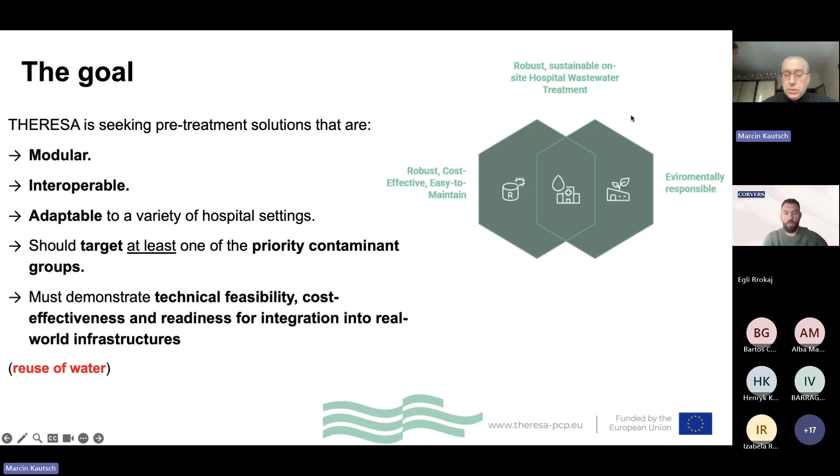work with that. And here in the brackets, you can see that I also mentioned the reuse of water. This is something that is also of interest to the hospitals. It won't be a mandatory condition, though it will be very welcome if you offer something like that. It's because hospitals use tons of water every day, actually. So if we can somehow go into more circular economy, reuse of water, it will be really good for us and also good for the supplier.

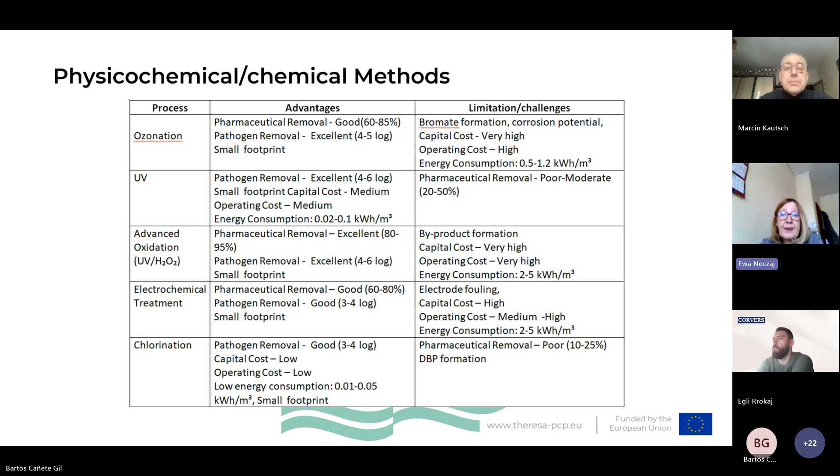Chlorination is not a good idea because disinfection byproducts are generated, but the main advantage is really low capital cost and operating cost.

Biological methods cover many different bioreactors, like MBR, and different types of filters. MBR is commonly used in a hybrid system.

Main advantages cover high total suspended solid removal, high pathogen retention, compact footprint, and modularity. The pharmaceutical removal efficiency is moderate, depending on the manufacturer. The main limitations are membrane fouling, capital cost, and operating cost.

The next bioreactor is also used in conventional technologies. The main advantages are high biomass retention, resistance to shock load, very high efficiency of pharmaceutical removal, compact footprint, and modularity.

Limitations cover potential for media clogging. The main limitation of this bioreactor is high capital cost and high operating cost.

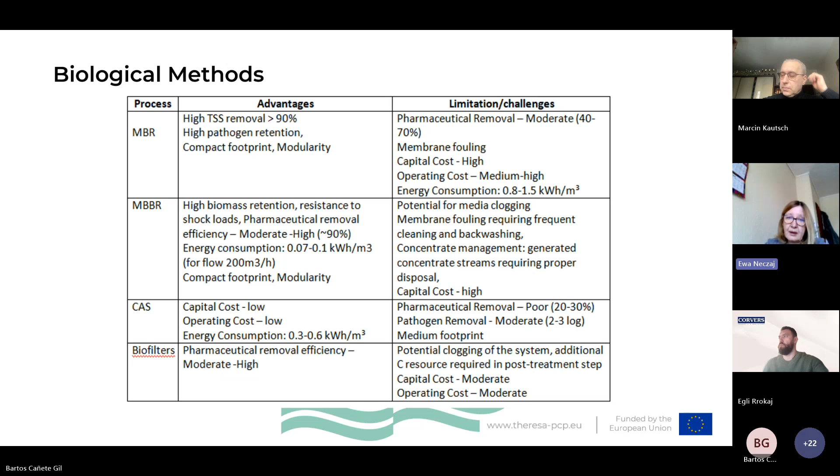Hybrid systems are the predominant solutions ready for use in the market. The main systems combine biological methods and advanced oxidation processes. The main advantages of the hybrid system are comprehensive contaminant removal, addressing both conventional pollutants and emerging contaminants.

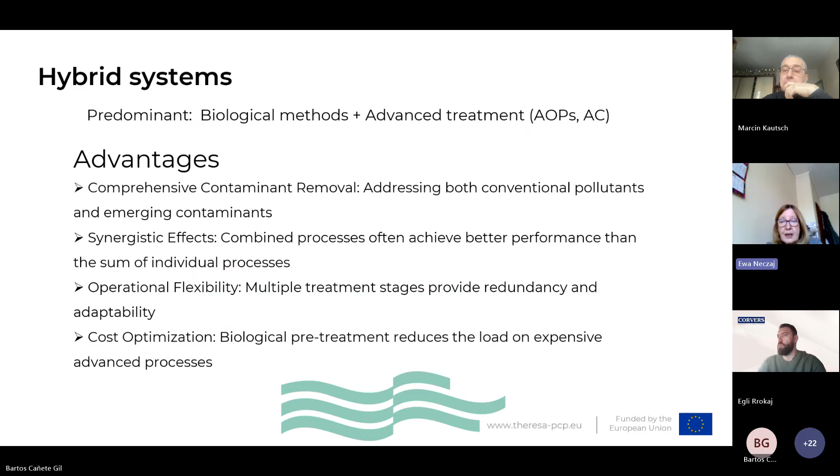Synergistic effects: combining processes often achieve better performance than the sum of individual processes. Operational flexibility: multi-treatment stages provide redundancy and adaptability. Cost optimization: biological pretreatment reduces the load on expensive advanced processes.

You can see on the next slide the efficiency of the hospital treatment process in a hybrid system. These results are from a real hospital. The efficiency of pharmaceutical removal is high, but only two compounds are relevant to the Theresa project: ciprofloxacin and clarithromycin.

As you can see, the efficiencies are really very high, more than 95%, almost 100%. The concentration of pharmaceutical in the effluent is also really low: for ciprofloxacin below 100 nanograms per liter, and below 20 nanograms per liter for clarithromycin.

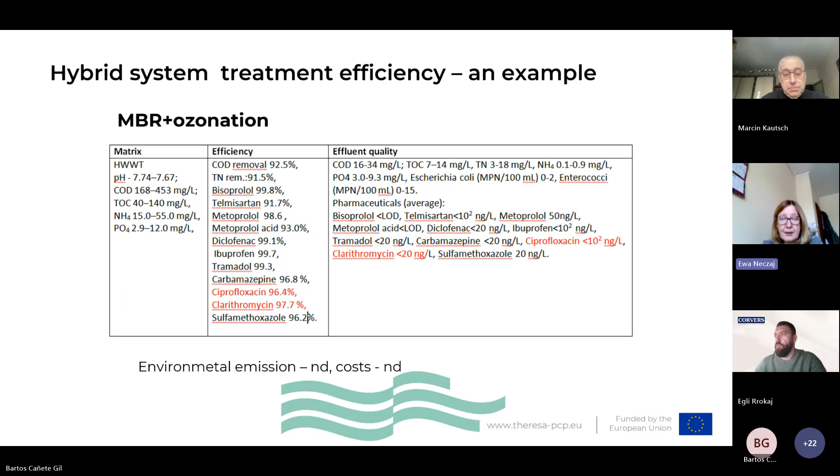May I have the next slide? The main gaps and limitations of the state-of-the-art analysis are the lack of technological solutions: compact modular systems, easy to operate, waste-free. And the next one is technical limitations, on-site scalability, integration with hospital infrastructure.

Economic limitation - high OPEX and CAPEX of the proposed technical solution - and no legal regulation for wastewater discharge from the hospital into a municipal sewage system for all European countries.

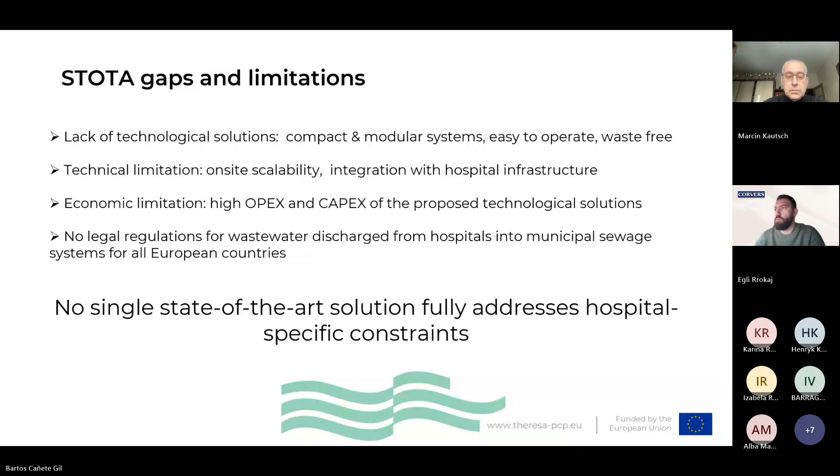First of all, thank you Ewa for the comprehensive presentation. So my name is Egli Rrokaj. I am economic procurement consultant at Corvers, and we are partners in the Theresa PCP consortium.

So the next presentation is going to be focused on the contaminants for each category that we are targeting as a project. The purpose is not to present the individual contaminants and the list, because if you go to the website, you can access all the lists and the short list of contaminants there. The purpose here is to explain the logic and methodology of how we derived and shortlisted these contaminants for each category.

So first of all, as a Theresa PCP project, we target four categories: cytostatics, X-ray contrast agents, antibiotics, and ARBs and ARGs. We want our solution to target all these four categories. And for each category, we have shortlisted some specific contaminants that we want the solution provided by the companies to target.

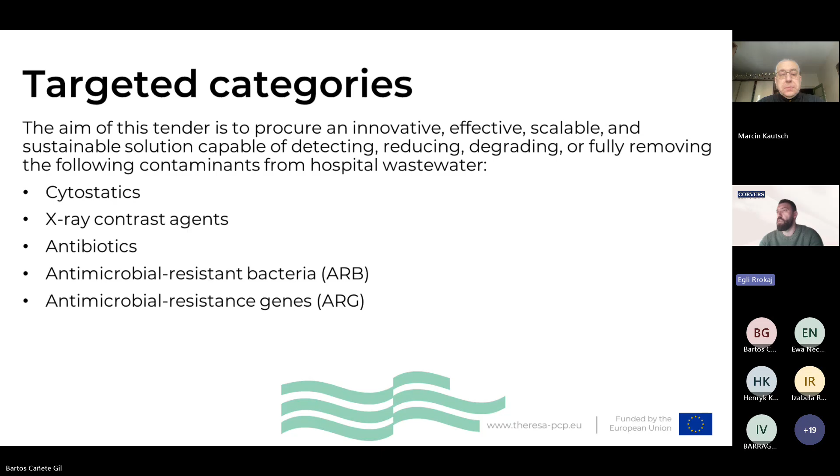Next. So in order to derive those shortlists for each category, we followed a process and a methodology, and it was kind of a long process. We started in September with a kickoff meeting, and we finished, and we're still working on the general requirements. After a long process, we finalized the list of contaminants for each category.

So that methodology started, as I said, in September with the kickoff meeting of the project, where we had an on-site workshop, and each end user was grouped by category according to expertise. Then we requested each end user to appoint a designated expert to help us with the workshop that we organized. Depending on the topic and the expertise, each hospital was bringing experts according to the need.

Then we shared an initial matrix with the suggested contaminants that we should target as category. This matrix was basically provided by Navarra FMS Hospital, the lead procurer.

Then, based on that, we started our first initial process in order to kind of try to see which contaminants we are going to target for each category. Then we organized bi-weekly meetings with the hospitals to ensure alignment and discuss which contaminants we need to target. And of course, we also had ad hoc meetings based on the need, every week.

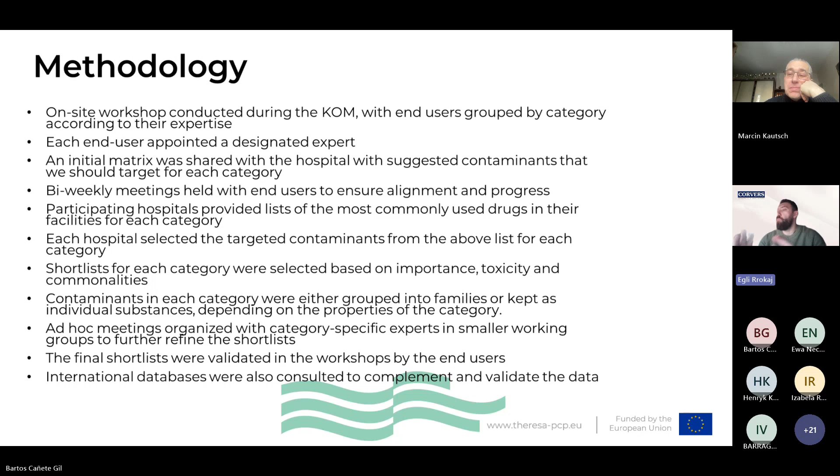And as I said, the shortlist had two elements. It was the input from the hospitals themselves, like the drugs that they use in the hospitals, the ecotoxicity, the environmental aspects, and the importance for the facilities. But also at the same time, we consulted international databases like the World Health Organization and list there in order for our shortlist, our data, contaminants that we target to be as more complete and comprehensive as possible.

So now we are going to go for each category, the contaminant that we choose, and kind of explain the logic behind it. I'm not going to go through the full list because, as I said, you have the full list in the website. You can go to OMC, you can access all the documents and see what specifically we are targeting. I'm just going to go through the logic behind each category.

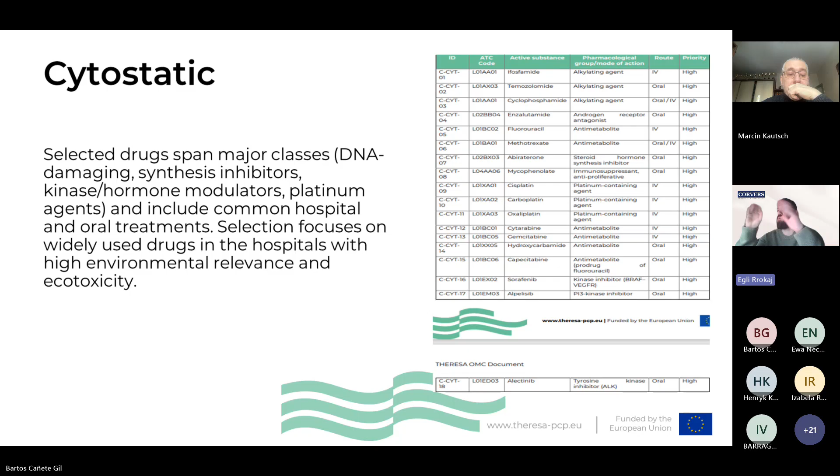First, for the cytostatic drugs, again, the selection here was based into families, and these families that we have several components, are the ones that are more widely used drugs in the hospitals, and at the same time they were shortlisted based on high environmental relevance and ecotoxicity. And as you can see, the selected drugs span major classes like DNA damaging, platinum agents, inhibitors, etc.

The next category is the antibiotics, that again, it was shortlisted into families. So we are targeting 8 distinct families. And again, this list had two elements. We took the initial list that the hospital provided of the most commonly used antibiotics in the hospitals. Then we complemented it, making sure it aligns with the World Health Organization priority pathogens classifications. And here, we focus on the critical groups, high groups, and medium groups. And here, the 8 families that we choose ensure coverage of widely used antibiotics with significant resistance concern.

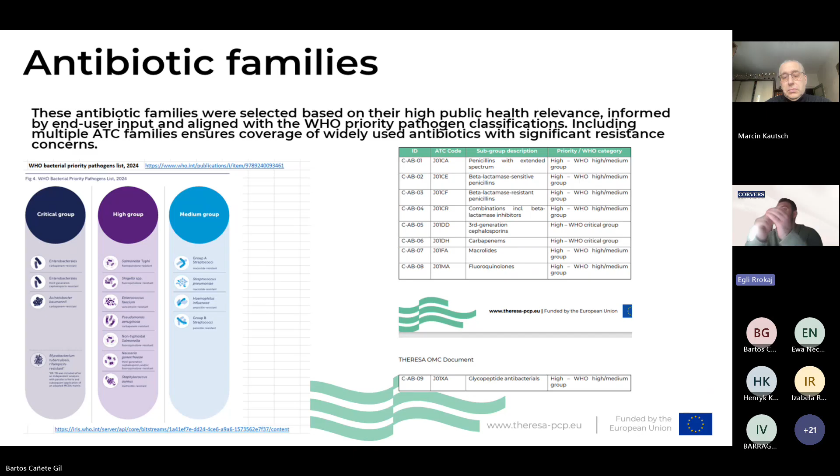And the next category is the X-ray contrast agents. Again, here we went with the family approach, and basically we split it in two distinct groups. We're focusing on CT and MRI agents, and again, this was based on what is most commonly used by the hospitals, that as Marcin correctly explained, we believe that what is being used at the hospital is being used widely in the whole Europe.

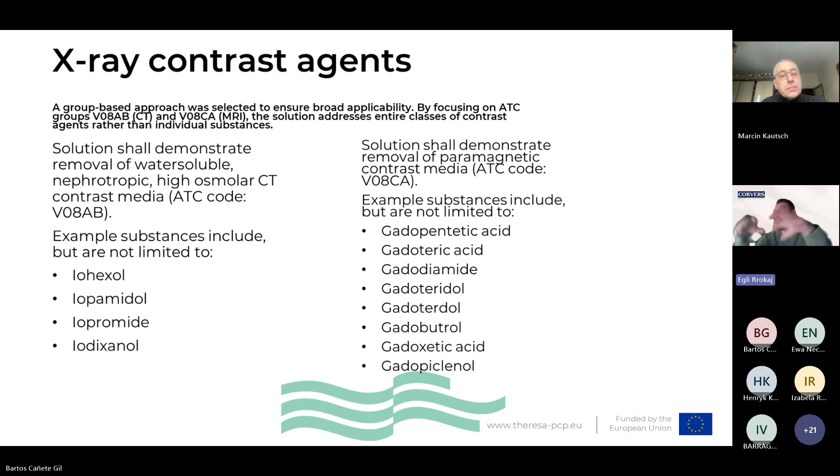And that is the reason that we are also focused on targeting specific groups. We split that into groups and families, because one hospital may not use iohexol, for example, but probably is using another contrast media in that category. So we believe that by focusing on the families and the groups, we are making our solution also to be used in the current 7 hospitals that we have, but also it has the possibility to be scalable and be used all around Europe.

The last category is the ARBs and ARGs list. Here we follow a different approach. We are targeting individual drugs and contaminants because based on the properties of this category, we believe that it's not a good approach to target families. Rather, we are targeting individual substances. And here, the selection has been made following the World Health Organization priority pathogens list.

Also, besides those 4 categories that are a priority for us and the solution must treat those substances, we are also targeting some additional drugs. We are targeting the drugs listed in the Urban Wastewater Treatment Directive as well as the Water Framework Directive. These are nice to have, should be preferably targeted, but we believe that since we are seeing that the European regulations are moving that way, and in the future those drugs and substances mentioned in those directives are going to be asked for the hospitals to be covered, we believe that preferably we would like to have them. And we believe that for a solution it would be nice to address also these categories.

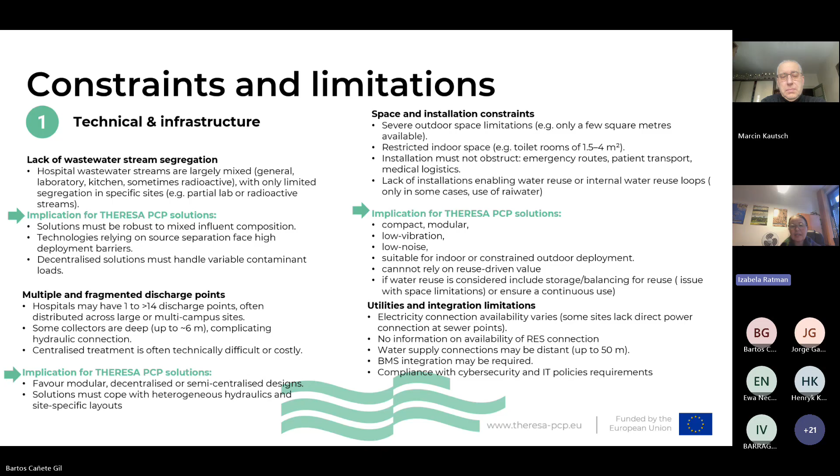On the operational and organizational constraints, the hospitals have limited capacities. They have also limited staff to operate this equipment. Sometimes these types of services are outsourced. So we are looking for solutions that would be low maintenance, highly automated, of course operating 24/7, operable without any specialized staff, and of course fail safe.

And something that I've already mentioned, the noise constraints, odors, which are very important, and the solutions also have to be pest-proof. So whatever you would like to propose has to be, first of all, enclosed, odor tight, low noise, vibration free.

On the regulatory and compliance side, as I said, these studies are still ongoing. Nevertheless, from the information that we got from the hospitals, from the baselines, some hospitals may need to comply with some physical chemical limits of the effluent for the discharge. This may be resulting from the discharge permits.

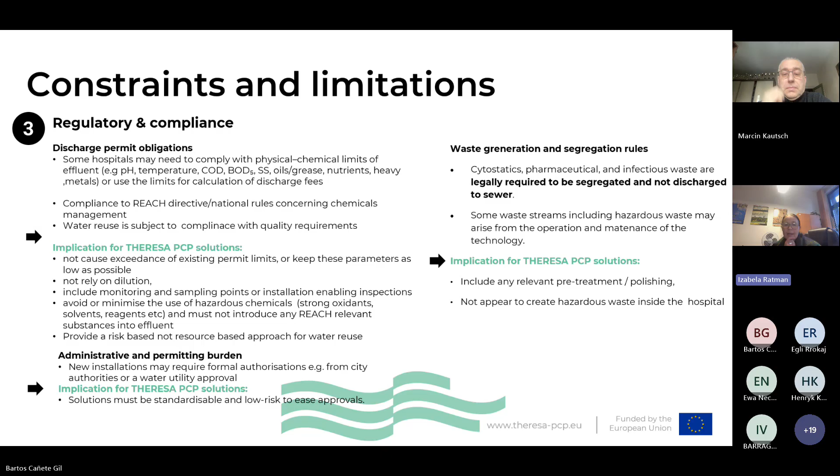Yeah, and one of the major constraints and limitations, which is quite important for you, is data related. You know for sure that there are no thresholds that would specify the maximum content or the removal rates for the target pollutants that have been presented to you. So that is really challenging.

We are working on it to come out with a proposal of reasonable solution here. We also have some limited baseline data concerning what is happening at the hospital grounds. The hospitals do not monitor the pharmaceuticals, the target contaminants presented to you. They also do not monitor routinely some key physical chemical parameters, simply because this is not required by law. Also, the estimates on the effluent flow, either daily or yearly, in many cases are based on the water consumption, because these are the typical sensors and meters installed in hospitals, mainly on the inlet of drinking water.

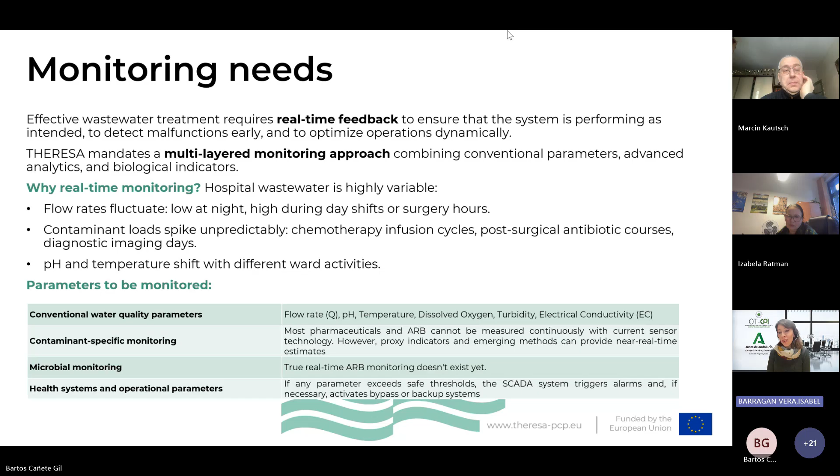Next slide, please, Bartos. Well, all the data that is going to be monitored through the solution should be logged continuously in a centralized database, should be visualized in real time via dashboards, should be exported for reporting, accessible remotely for troubleshooting, time-stamped and traceable, stored securely, and reported transparently. Hospital wastewater is not a clean lab matrix, that is why the monitoring system must tolerate high organic content, suspended solids, variable pH, and temperature swings.

Next slide, please. Also, another requirement of the final solutions is the need for automated sampling and digital integration. Theresa requires the automation of sampling and data integration from targeted contaminants. The main reason is that manual sampling presents different challenges. Nowadays, manual sampling and data entry are slow, error-prone, and incompatible with 24/7 hospital operations. It also requires trained personnel who have to visit the treatment site multiple times every day. Manual sampling also comes with risk of cross-contamination and sample degradation, and it cannot capture transient events.

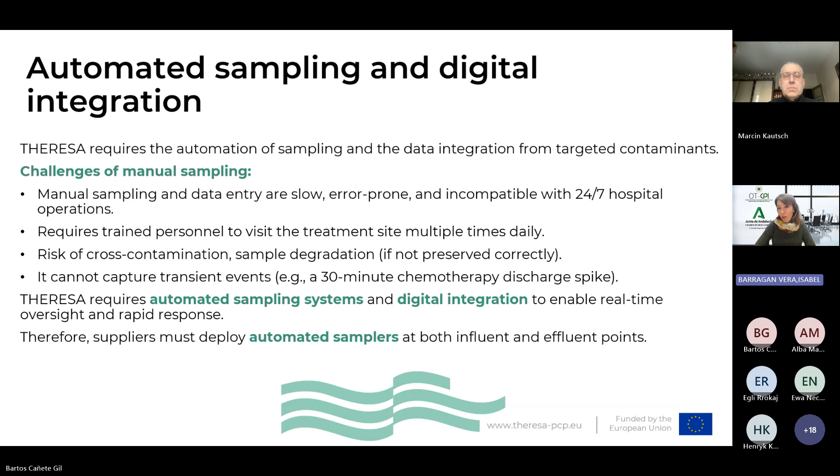For example, a 30-minute chemotherapy discharge spike. That is why Theresa requires an automated sampling system and digital integration, so we will be able to have real-time oversight and rapid response. Therefore, for all these reasons, suppliers must deploy automated samplers at both influent and effluent points. And I think that's all from my side. Thank you.

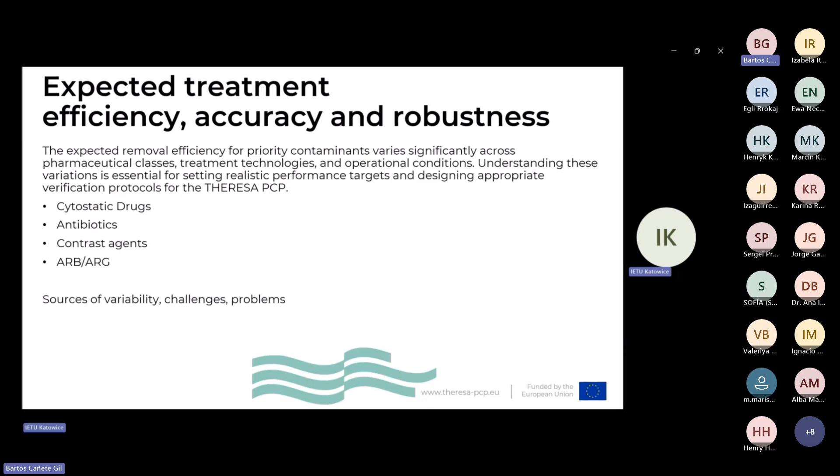I would like to say a few things about sources of this variability, challenges, problems, and expectations. First, the expectations at the level of proposal.

There was 50 to 90% reduction of all contaminants, including cytostatics, above 80% reduction. In case of X-ray contrast agents, there was between 40 to 50% reduction. In case of antibiotics, the removal rate should be above 90%, and for antibiotic-resistant bacteria and genes also above 90% removal rate.

Nowadays, there are different approaches. We would like to propose thresholds for removal. In European countries, there is no strict rules or regulation for presence of antibiotics or other pharmaceuticals in water, so we have to rely on guidelines and some precaution levels for surface water or discharges of wastewater.

I was responsible for desk study and pilot installation. We have more than 70 studies collected in our database. We wanted to focus on treatment efficiency, but also other data was collected like the technologies, initial conditions, emissions to water, or cost and energy consumption.

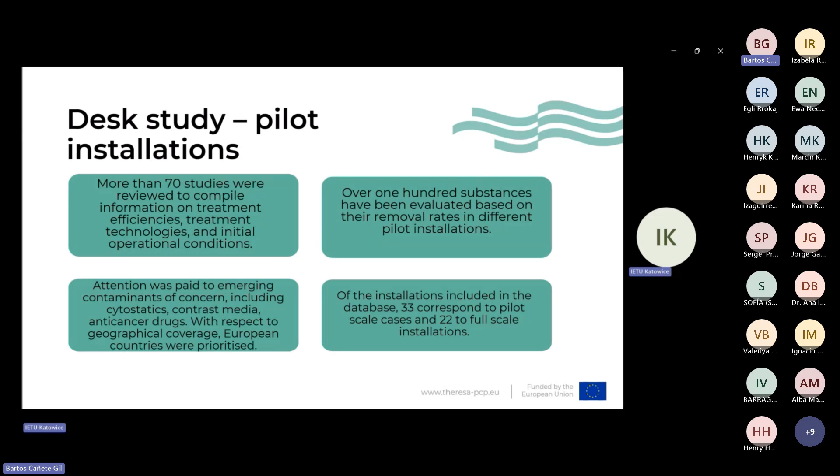Of the installations, there was 33 pilot installations and 22 full-scale demonstration installations. We collected data about 20 technologies.

There is, of course, more popular technologies like membrane bioreactor, membrane process technologies, nanofiltration, ultrafiltration, filtration by sand, activated carbon, and activated sludge processes. But there are also more exotic technologies like fungal treatment or constructed wetland.

These investigations were focused on raw hospital wastewater. Of course, there is a mixture in this hospital wastewater from different departments, from kitchen and laundries. In some cases, there was a bypass made on the sewage network system, and the stream was only from one ward, like for example the oncology department.

In case of results, I would like to present the efficiency treatment for antibiotics from our database. You can see that there is a high variability for this efficiency, from minus even 600 to 100, to almost all removal of pharmaceuticals from wastewater. There is a wide span of the efficiency treatment.

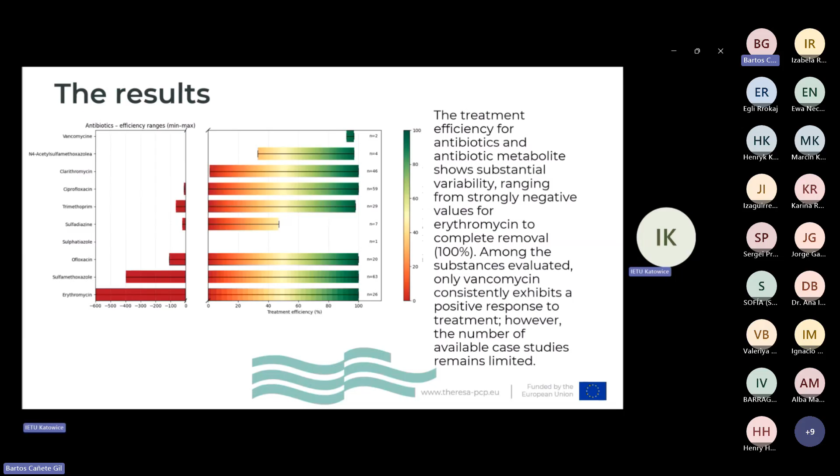This is not only the case of antibiotics; also for other substances like metabolites, we have a similar phenomenon, where the reduction rate is from minus 100 to 100, so total removal of substance from wastewater. Rarely, in some cases, we have this narrow range. I would like to underline that the number of cases is also variable, like from 1 case to even 60 cases.

In case of targeted substances, we have X-ray or MRI data, MRI substances: iopromide, iohexol, and gadobutrol. For iopromide and iohexol, we have data from some studies, from 3 to 18 studies, and the best technology of removal is membrane process or activated sludge process. In case of gadobutrol, which includes gadolinium, we have no data at all.

In case of cytostatics, we have several substances. Only a few are documented, like cyclophosphamide and ifosfamide. I have one study for substances that include platinum, like cisplatin and carboplatin; there is one study where the treatment removal is up to 60%. In case of other cytostatics, the removal is very variable, from minus, so very negative values, to 80-90%.

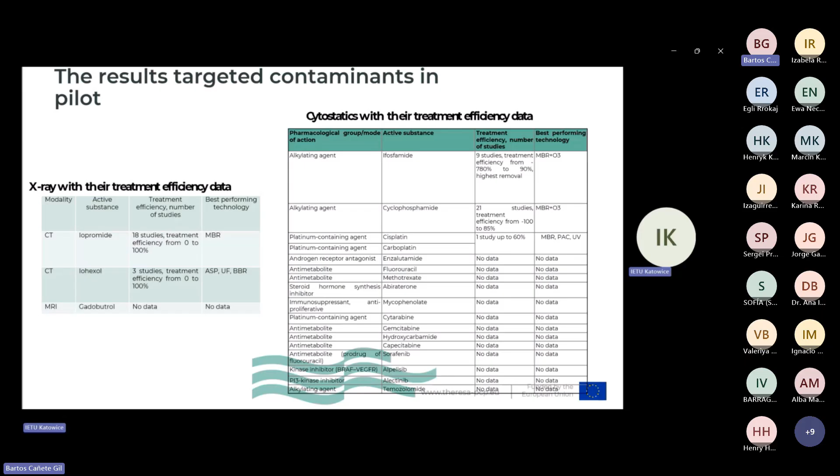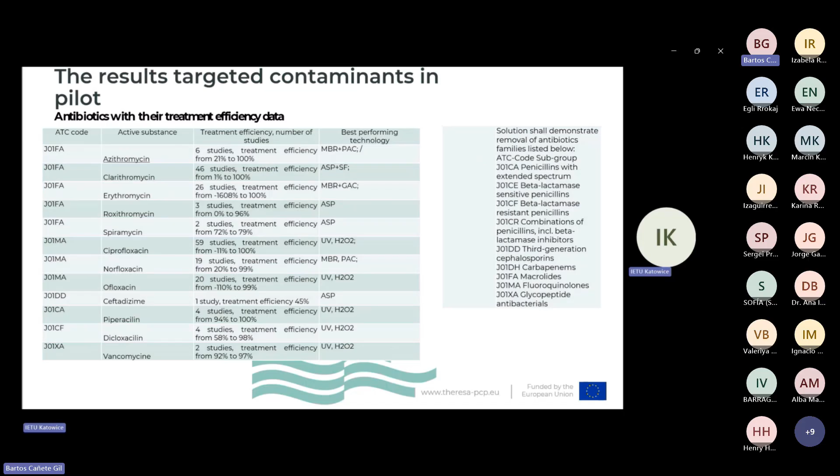In case of antibiotics, we targeted not particular substances, but groups of antibiotics, though we have some examples of active substances - a lot of antibiotics. We have more data here, like from 1 study to 59 studies, and treatment efficiency is also variable, from several percent to 100%, and we also have the best performing technology indicated.

Ewa probably said it earlier, but we also have commercial solutions. There are a few commercial solutions on the market, characterized by high removal of pharmaceuticals, often exceeding 90%. We have the Xeno system by Veolia, which achieved average removal of 90% for some pharmaceuticals.

We have hybrid membrane and ozonation systems by Kubota and Xylem Wedeco, also characterized by very high percentage of removal. PharmaFilter is very interesting because it removes not only pharmaceuticals from wastewater, but also from waste, and it is also very effective in removing APIs and resistant genes. At the end there is also Ultra Aqua, which is also very good at removing pharmaceuticals.

What I've noticed during the desk study is some challenges. In this slide, we have a table from a report from the PILLS project, with 2 cases from Germany and Netherlands, and you can see the number of samples is quite limited. There are 6 samples from Germany and 6 samples from Netherlands during the project, so it is quite modest.

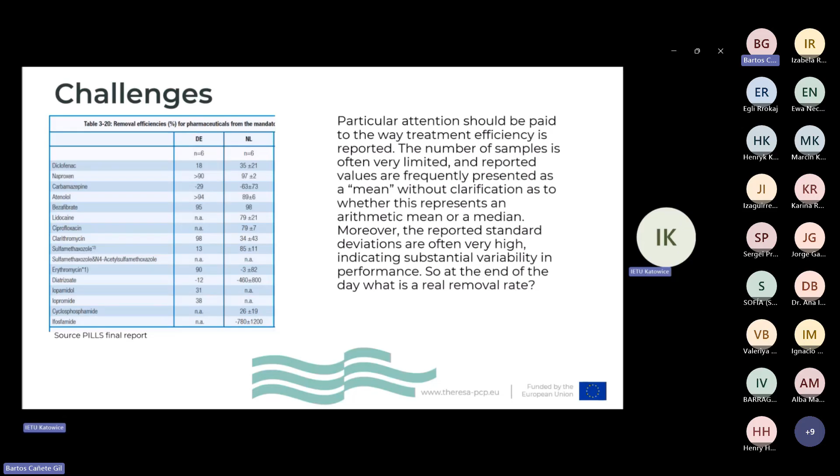We also have a style of reporting issue. We have usually mean plus minus standard deviation, but we don't know what this mean is. Is it arithmetic average or median? Also, the standard deviation is very high in some cases, which means high variability. So at the end of the day, we cannot say what is the exact removal rate for some pharmaceuticals.

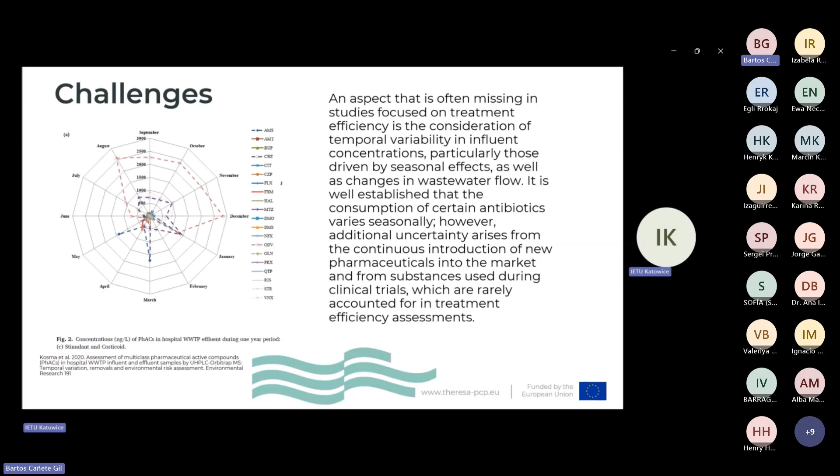Also challenging is tackling seasonality, because wastewater from hospitals is not the same during the year. Of course, we have some spikes from antibiotics during winter or early spring, so it is important to handle this seasonality in performance. I found only one study which presents the exact concentration of pharmaceuticals in wastewater across different seasons. So this is challenging, I think.

Also robustness - I have to say a few words about robustness. What does it mean? It means that the performance of the technology is resilient to some changes, changes in flow of water, inflow of water from different departments and units, and changes in wastewater characteristics like chemical concentration.

It should also be reliable in case of some failure, like clogging, corrosion, with some alarm system. Also, it would be nice to have safe operation for staff, who should be trained. And also the integration with hospital conditions, so compatibility with space constraints and existing infrastructure.

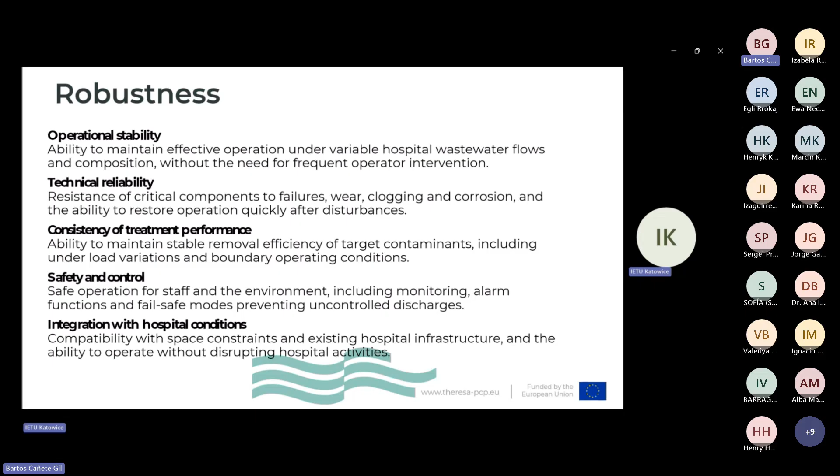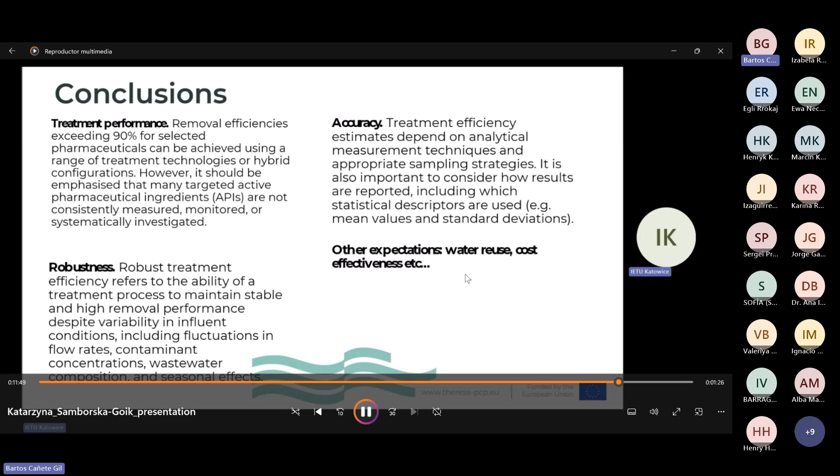Shortly, conclusion. First, removal efficiency exceeding 90% can be achieved using different technologies - it can be one technology or some hybrid solution configuration, but it should be measured, monitored, and investigated during the whole year, I think.

Accuracy - in case of treatment efficiency, we have to rely on analytical measurements that should be valid, high quality, high fidelity, and we have to remember how we display the data and results, so what is the mean, what is the standard deviation. And of course, at the end, we should rely on this.

The technology should be resilient to different conditions, to different problems during operation. So I think that's the case.

And I have to say a few words about other expectations, because we don't only want great performance, but we want recycling and cost effectiveness. So thank you for your attention.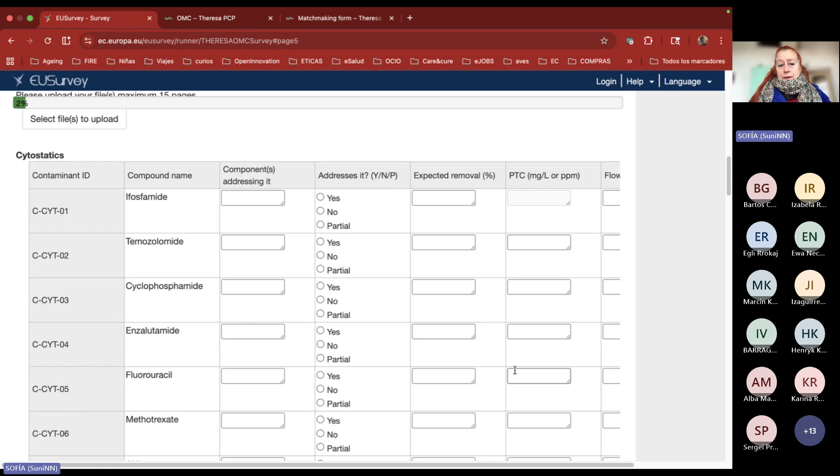One very important thing is that you must be sure that when you finish, you properly submit the questionnaire. Please fill this CAPTCHA and be sure that you submit, otherwise we will not receive it.

In case you need a template of this questionnaire in Word to facilitate your job, please ask for it through the contact in the website.

If you want to have more information about this OMC participation, you will find that in the previous event, the one in Estonia, we have developed a little bit more the details of this participation.

Please send us your information. We need your knowledge to be able to tailor the tender to the real opportunities that the research and development ecosystem in water in Europe is facilitating.

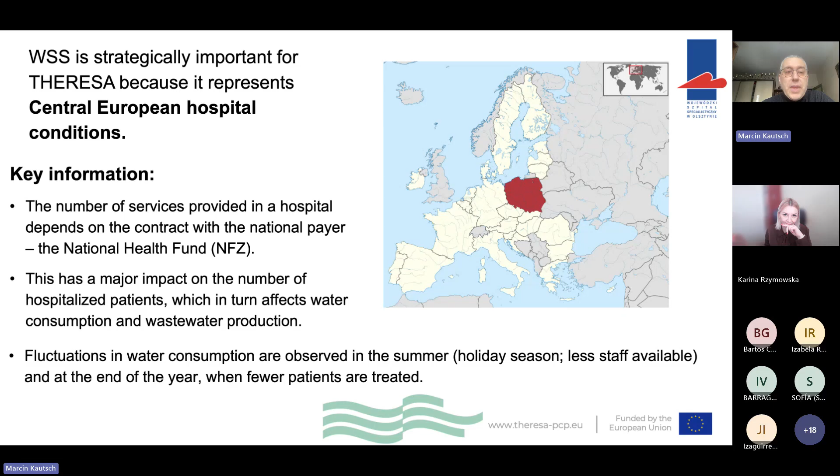Okay, and now to Karina Rzymowska, with whom we are working on the project. Karina, just tell me where to go next. Okay, thank you. My name is Karina Rzymowska, I work at WSS in Olsztyn.

And I present a slide about what we need, what limits us, and what law we must respect. The hospital needs a wastewater treatment plant that will process wastewater to achieve the highest level of purity and safety of the treated water before its reuse. It will reduce the cost of discharging wastewater to the municipal treatment plant, and improve the safety of residents and the environment.

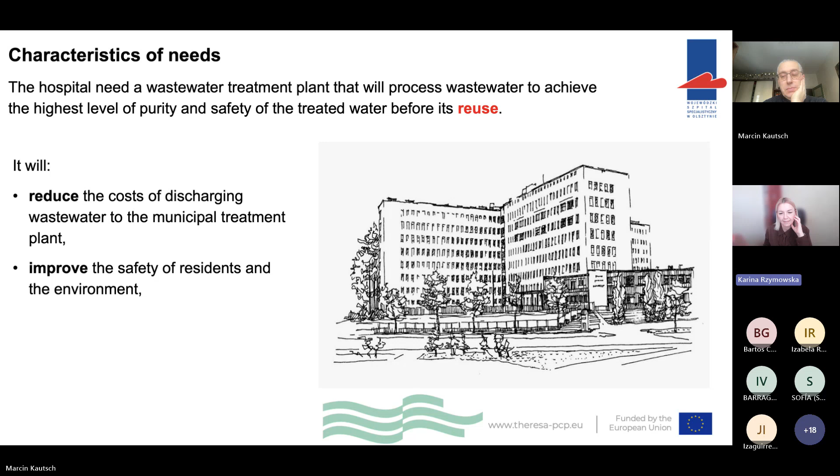We've got limitations — limitation of space, localization issues. We've got limitations about the treatment plant's operating hours, noise, smell, and terrain. The hospital can't accept burdensome conditions for the patients and other residents.

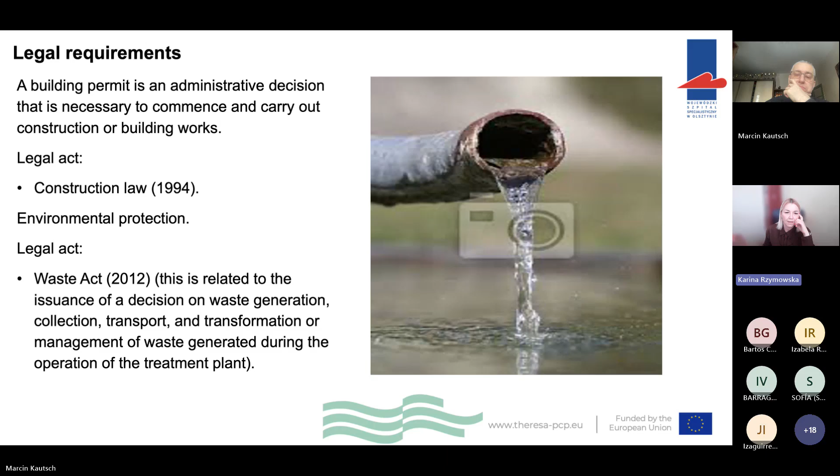The main legal acts governing the issuance of permits and decisions are the Polish Water Law 2017, the Act on Collective Water Supply and Collective Wastewater Disposal 2001, the Construction Law 1994, the Environment Protection Law 2001, and the Waste Act 2012.

International environment and European Union directives — we've got the Antimicrobial Resistance Regulations emerging, the Urban Wastewater Treatment Directive 2024/3019, and the One Health Action Plan against antimicrobial resistance. All these international regulations may in the future affect the quantity and quality of permissible pollutants in Poland.

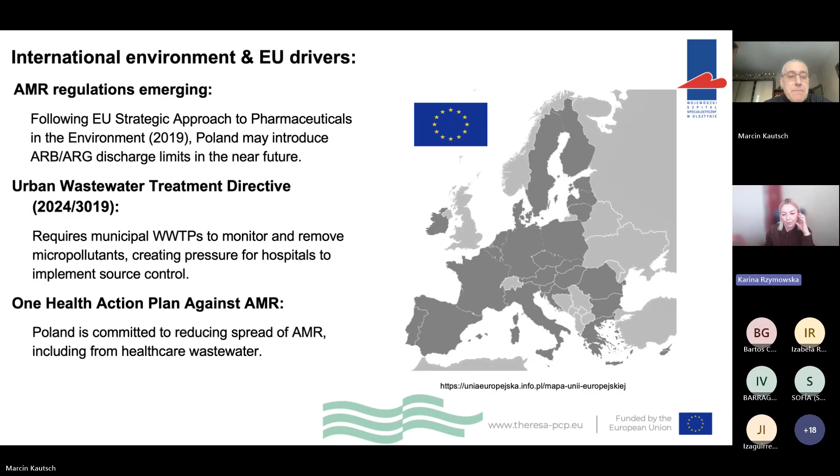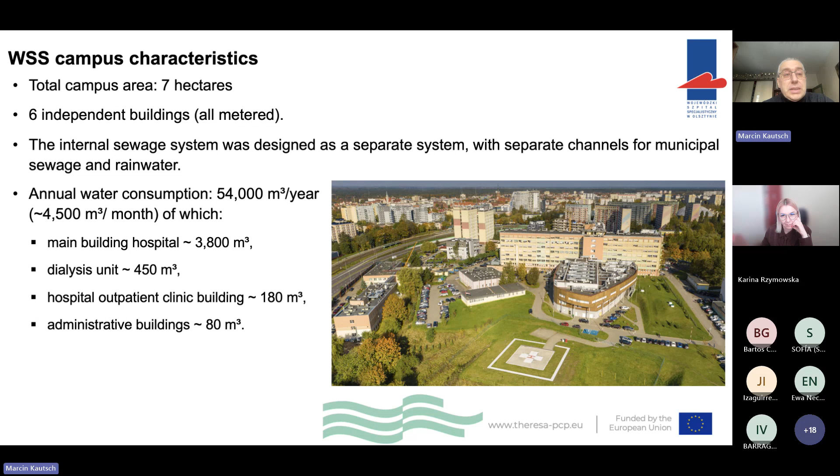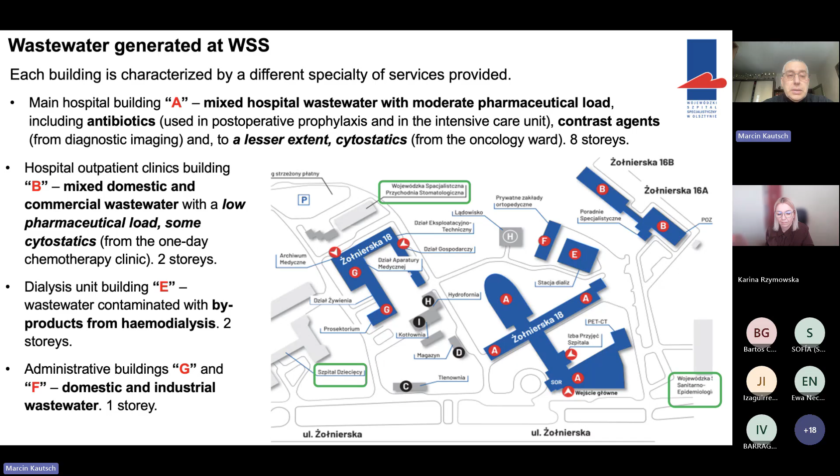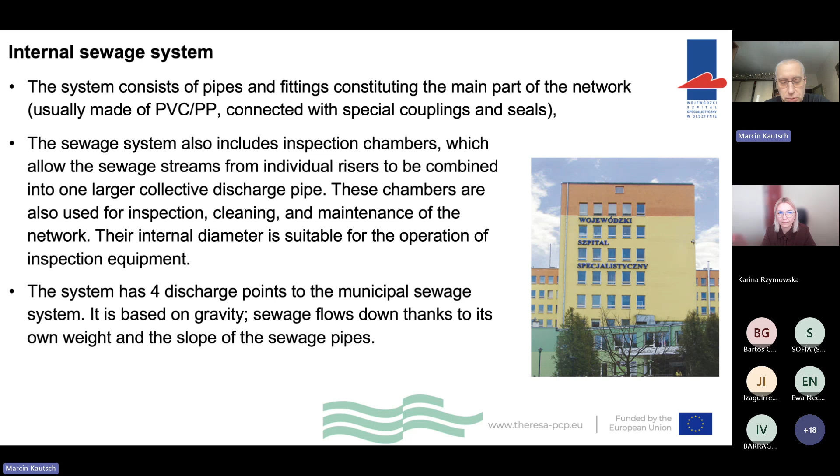As I mentioned, we have the internal sewage system. I wouldn't say it's standard, but it's normal, if I can use such a word. So there are pipes, there are chambers, there's everything. What is important, and I'm going to show it on a map in a moment, we have 4 discharge points to the municipal sewage system, and they are all based on gravity. You'll also see on the map that there are differences in heights. The hospital is located in one of the highest points in Olsztyn, which is also something to be taken into consideration when we are talking about moving water back and forth.

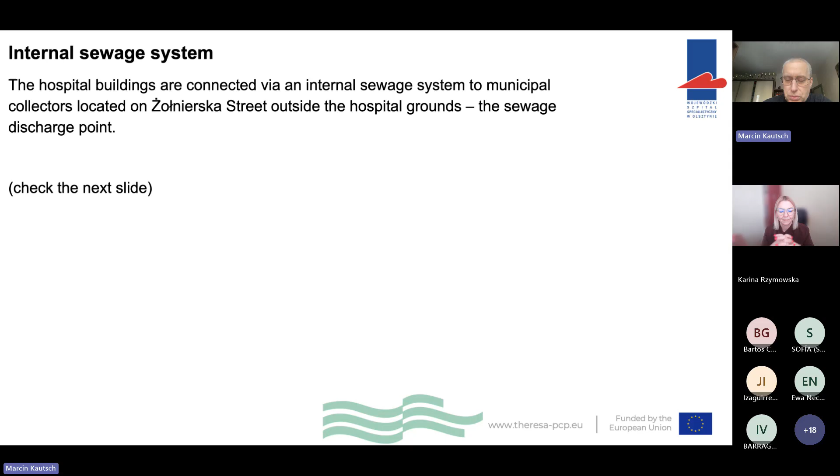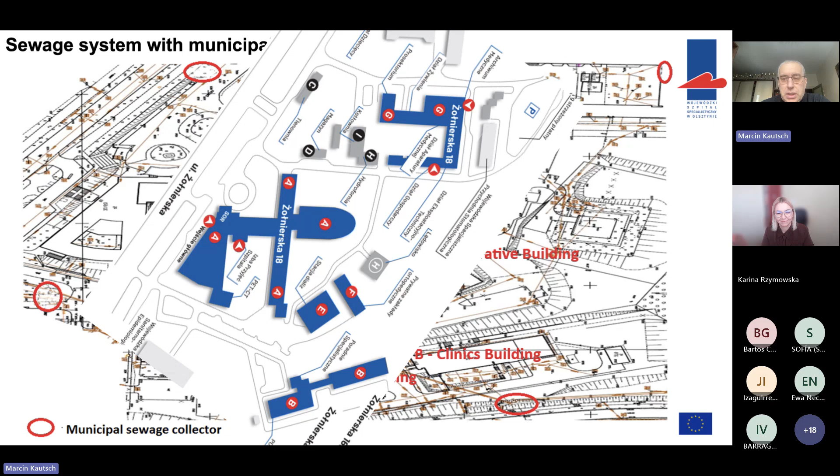I'm going to show you the map in a moment. It's a bit complicated, there's a lot of details, so let's go one by one so you can have a better understanding of this picture that shows the internal sewage system. I know it's a lot, so don't worry, don't panic. First, I'll show you the map I just showed you. Let me remove this and turn it so we can have a connection with the last one. That's what you just saw, and that's what we're going to see in a moment. So it's a bit twisted. Now we can go to the final map of that slide.

You can see the main building, you can see all other buildings. You can see if something is marked in, I'd say, a bit brown, but the colors are always a point of discussion. So that's a bit complicated. Within the hospital, there's also something that's outside the hospital, it's not ours. And marked in red, you can see the municipal sewage collectors. As I just said, we have four of them, almost in every corner, which means that some of the wastewater goes here, some there, but it's all in a more or less short distance.

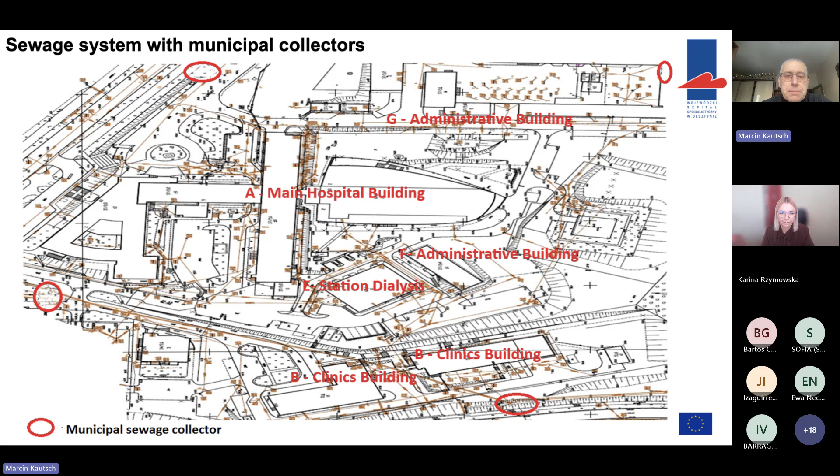Our specificity, or our conditions, is that we don't have the capacity or knowledge to run the system and maintain it fully, etc., so this is outsourced to another company. We of course have somebody who oversees that and checks what's happening, and our employees also go around and do the daily checks, but when it comes to servicing or repairing, we do require somebody to do that. We also have, as I mentioned, the rainwater drainage system. I don't know if it's of key importance, but just to let you know, if somebody has a solution that uses that, this is also something to be used.

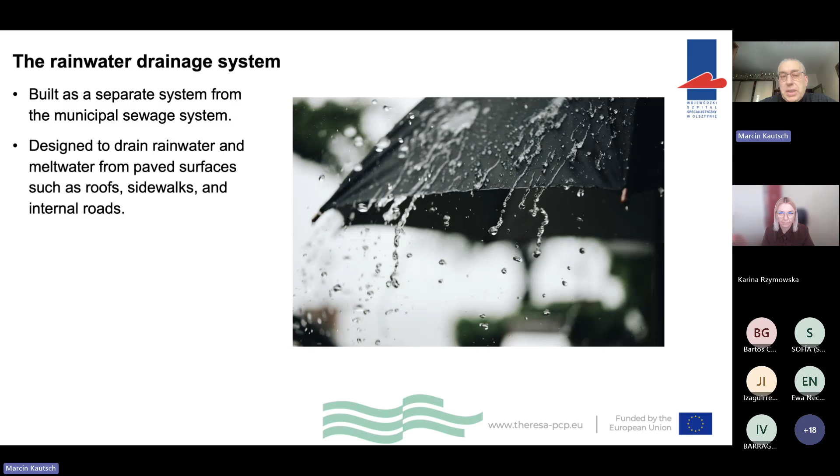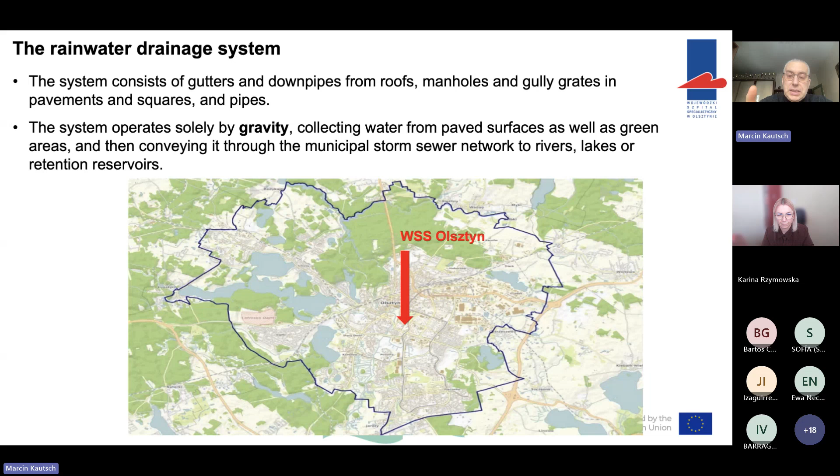This is also more or less the standard thing, it also works on gravity. Here you can see the map of Olsztyn, and where this hospital is located. Warmia-Mazury, the province we are talking about, is sometimes called the green lungs of Poland due to its very unique environment and characteristics. There's a lot of post-glacial lakes and forestry. It's a place where people would go for holidays in Poland, and we are, as you can see, in the city center almost.

I mentioned it already, but there's something more specific to our hospital, which is this possibility of reuse of water. Apart from what we just saw and heard, all these requirements, we think there's a possibility of using the water from the central sterilization station and dialysis unit for a number of reasons.

First of all, they are relatively big sources of water - not as big as the main building, but pretty substantial. These are located very close to one another, about 50 meters, so very close. And it is not as contaminated as the other water we just talked about. We did some preliminary tests, so this isn't something to treat like a Bible, but we can see that the water from these sources would probably be a bit easier to treat. So please make use of that as well.

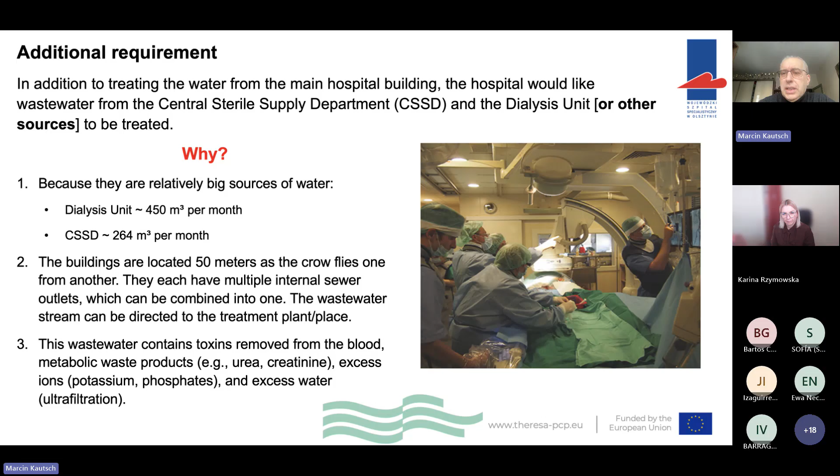Most hospitals would have central sterilization, and pretty many - in our case almost everybody - has the dialysis unit as well. That's where it's located; you can see again the main building, the central sterilization, and the dialysis unit. As you can see, they are very close to one another. And that's it on my side.

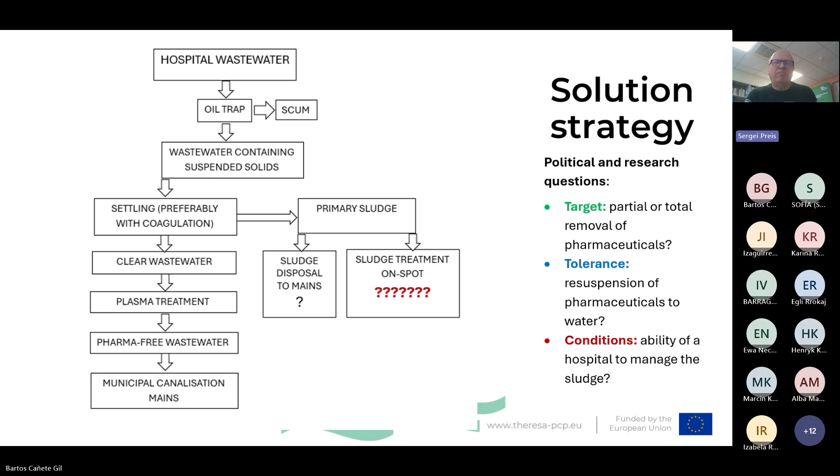Next slide, please. This is just to remind listeners about the essence of pulsed corona discharge, which provides plasma containing active oxidants. And what is most interesting is that the radicals - these hydroxyl radicals and other active oxidants - are formed at the surface of water sprinkled into the plasma zone.

Another interesting feature is that all the molecules demonstrated today, these pharmaceuticals in general, are of partially hydrophobic character, gathering at the same surface from inside, at which we have hydroxyl radicals concentrated from outside, bringing them into tight contact. We have experimental proof for that - I will also say a few words about that.

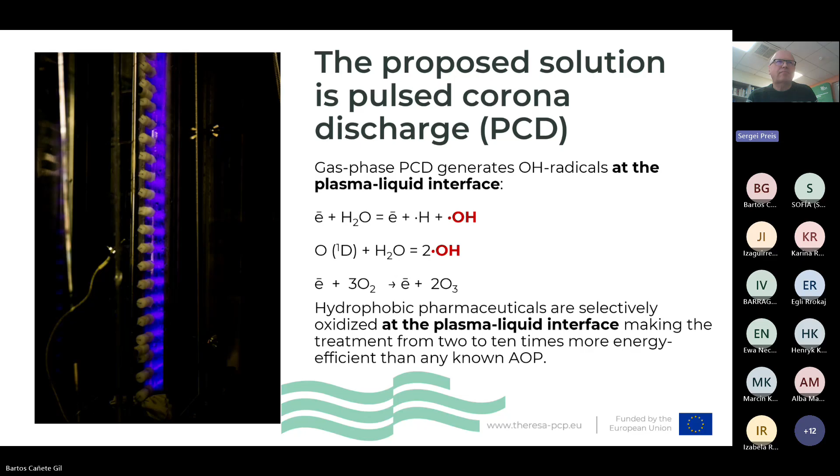Let us see the next slide. Thank you. The approach was tested at two types of hospital wastewaters in Finland. One hospital was South Karelia Central Hospital, Lappeenranta city in Finland, and another was a medical institution in Espoo, next to the capital of the country, Helsinki.

In the first case, as I mentioned already, the primary wastewater was treated with pulse corona discharge straight after the settlings removal, rough removal. So if we are talking about the proper approach, I would remove more than that - I would also remove colloids and apply pulse corona discharge, having the result much, much better.

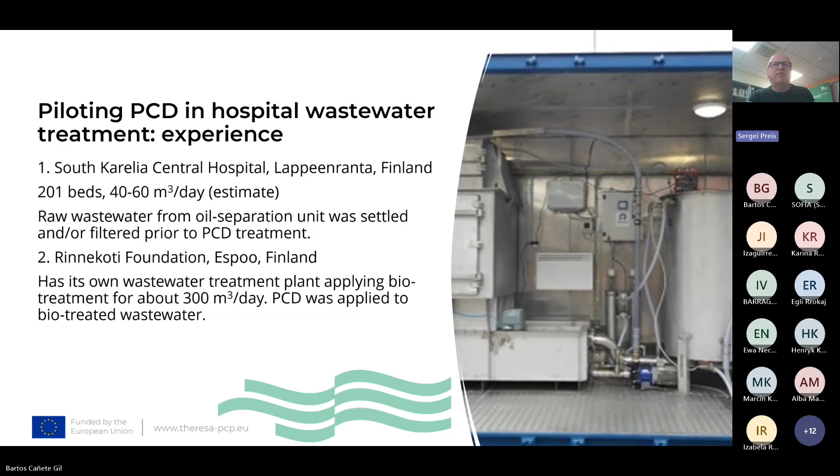In the case of the second institution, the institution has its own wastewater treatment plant, including biotreatment. As a result, it was biologically treated wastewater with an energy dose from 100 to 300 watt-hours per cubic meter, removing more than 90% of residual pharmaceuticals. At the picture, you may see the pilot device with pulse power around 2 to 3 kilowatts, able to treat a few tenths of cubic meters per hour.

This indicates that pulse corona discharge is indeed a unique, energy-efficient approach to concentrated wastewaters, as concentrated as human urine, for example. And the next slide, please, and the last one.

Thank you. So, I don't know what I should comment on this text - we have a very good treatment method which saves energy. We surpass ozonation by a factor from 2 to 10, dependent on the process organization, in energy consumption. So if we are talking about advanced oxidation processes, this one is definitely the most advanced and economical advanced oxidation process. Due to energy efficiency, it leaves a reduced carbon footprint, no noise, very compact, no vibrations, and modular structure - simple, reliable, no sign of corrosion.

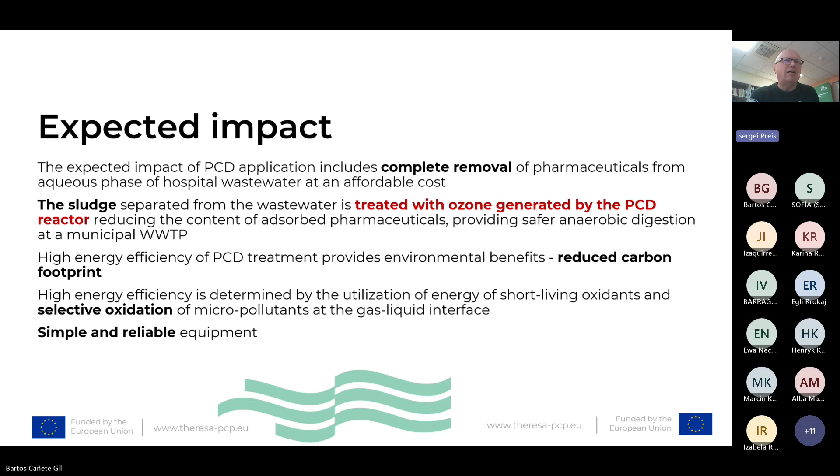In the first device we built in 2009, it still works all right. And this is probably the last slide - I don't see anything I can... sorry, this one is, I have to emphasize here.

The university is not the organization, not the company which will provide the service. We work in tight cooperation with Vuoksi Osakeyhtiöt Oy in Lappeenranta, Finland, which provides the device, its automation, connection to the hospital system, and making all necessary arrangements. We provide research support - we have a laboratory device which is necessary for tailoring the technology. And we need partners in this solution, which are perfectly described in our questionnaires, both Vuoksi and Tallinn Technical University.

This is it. Thank you very much.

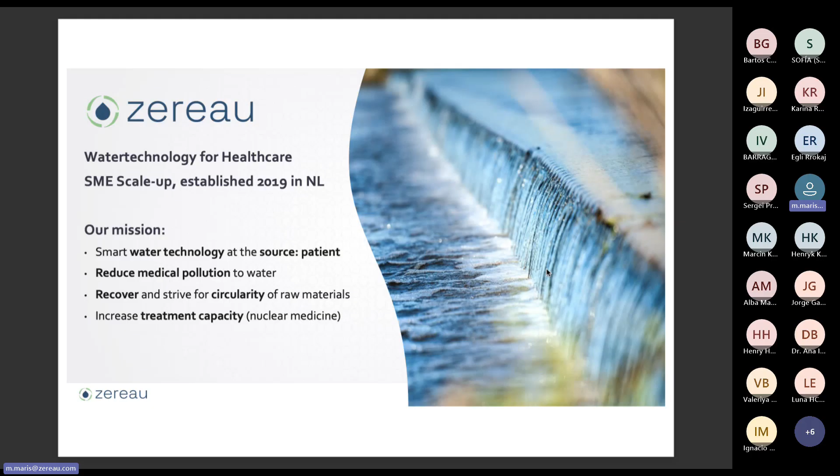I don't want to elaborate on the specific problem - we all know this because it was presented already. Here you see a couple of our systems that we've installed for radiology departments, and sometimes, like in these pictures, we use the disabled toilet room to have a little more space and combine a urinal, a men's toilet, and a normal toilet.

Our point sources, where we focus, are source capture from urine, because almost everything you take, particularly in the quick excretion phase of patients, is excreted by urine. By capturing and focusing on the concentration of urine, you have high concentrations of medical pollution and low volume, which is a unique combination for very efficient treatment methods.

We use adsorbents in particular. We don't want to destruct, because we aim to be more circular, both in our filters by regenerating them, as well as by recapturing the source materials, like I referred to for contrast media.

So most of our systems, and it's not only toilets but sanitary-based at the source, are tailored to target medical residues. We have specific filters for contrast media that are tailored for contrast media.

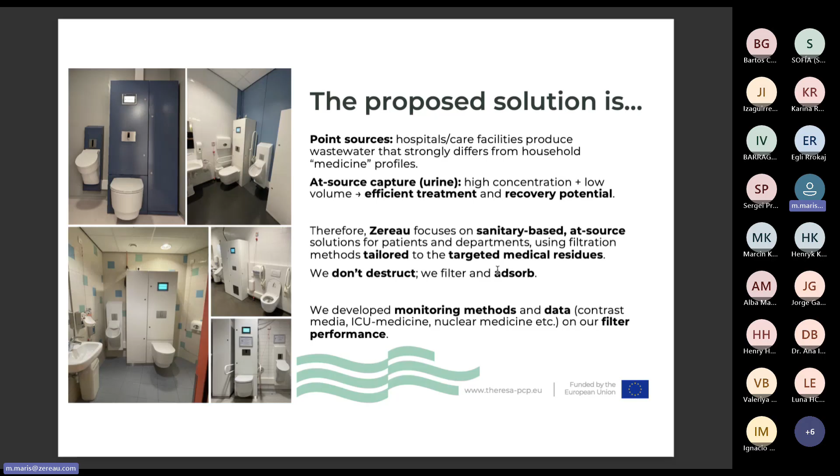In order to prove the effectiveness of the filters, we have always set up monitoring methods together with our clients and built up quite a lot of data on contrast media removal, ICU medicine removal, and nuclear medicine removal.

So, expected impact - I hope this solution can be part of the bigger solution needed to target medical pollutants in our waters and environment. It's not the only solution, but it's a very effective way to individually address hotspots in a hospital.

We already have quite some clients, 30+ hospital projects, most of them in our home countries like the Netherlands and Belgium. But we also have some contrast media systems in Italy, Germany, and France.

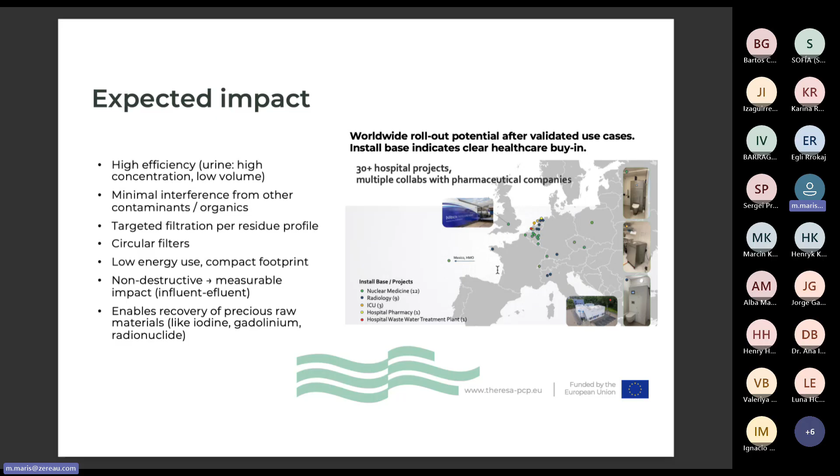Like I already referred to, we try to make the filters as circular as possible, so we regenerate them. We have a very low energy use of our systems because they're implemented in the complete hospital process, and we enable the recovery.

So I hope that in Theresa we will use our proven building blocks or modular systems to develop and validate next generation configurations in which we can broaden the scope and accelerate our scalable adoption for hospitals.

And I am particularly interested in new application modules or systems for oncology, or to spread through the whole floor and wards, and to find optimized best fits for other applications.

And post Theresa could be a success that depends on 3 pillars, like lowering the thresholds with viable investments and a clear regulatory pathway.

One thing I want to add to our approach: we really intervene with the patient, because he is asked to use a special toilet, and that's not only for hospitalized patients, it's particularly for outpatient patients as well.

So within an hour, you will excrete about 50% of your dose in many cases. So the management of patients, making them collaborating - the soft factors of our technology are just as important as the technology factors.

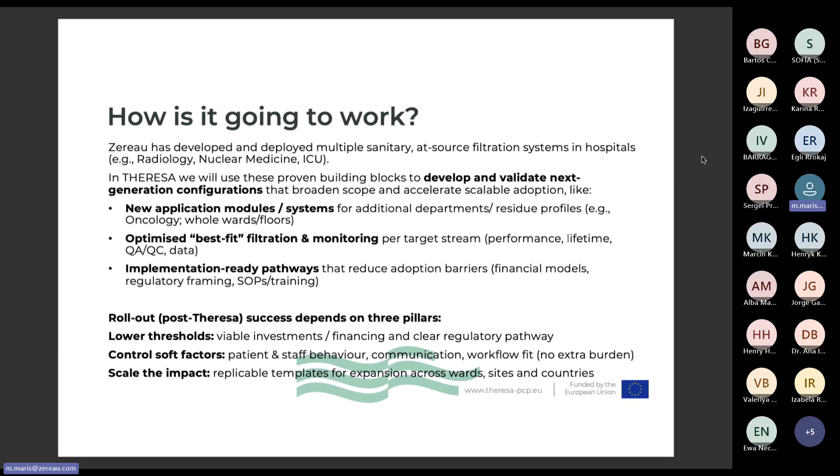So this is what I wanted to present to you. There's a lot to tell and a lot of experience to share, and hopefully we can join this project in the future so we can share our knowledge with the audience. Thank you very much.

Fantastic, Maris. So now it's time for the summary, for the recap of the questions and answers. Maybe John, do you want to take the stage? Presented - can't hear you, we cannot hear you properly, John. Is it better now? Now we can, thank you. Okay, maybe I will be closer to the microphone.